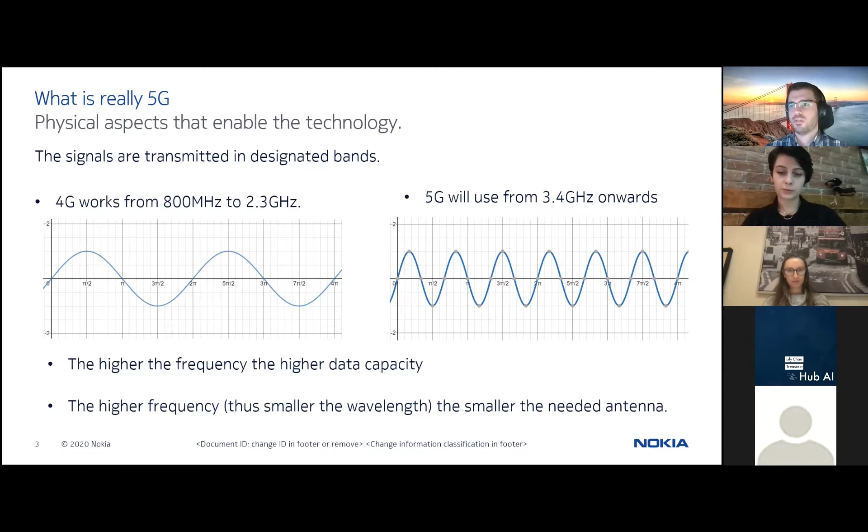If we move to the old solution, the antennas usually radiated everywhere. You could have a phone, not even using it, but the antenna is still transmitting to your phone, like 'hey, are you here? Are you available for me?' What this means is that we are losing a lot of power. The antenna is constantly transmitting, everybody's getting radiation, everybody's getting data that isn't useful for them. And you cannot predict anything, you don't want to predict anything. You just transmit everywhere, that's it.

But if we move to high frequencies, and avoid having a building between your antenna and the device you want to reach, then we can lower the power of the signal and direct the beam directly to your device. This brings a new term: massive MIMO antennas, meaning multiple inputs and multiple outputs. Because these signals are so small, we can build smaller antennas. So now we have hundreds of mini antennas in one array, while before we had only one big antenna transmitting everything. Now we have hundreds of antennas that have the opportunity to create beamforming.

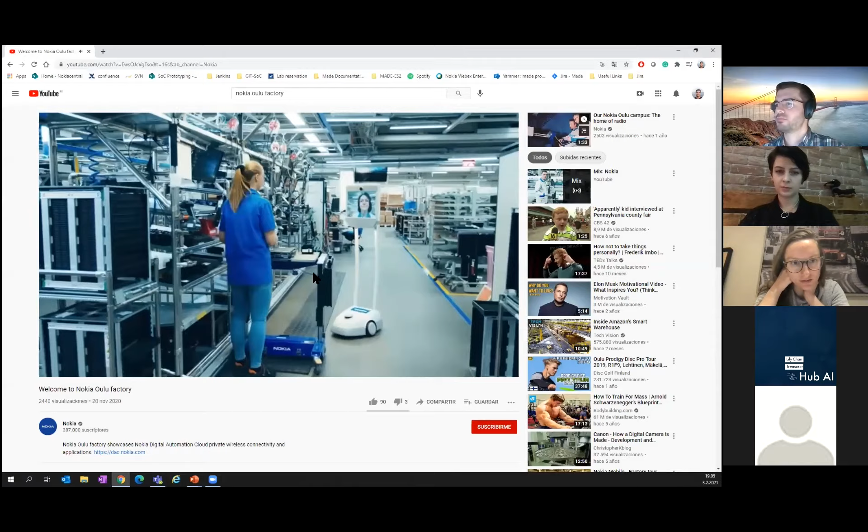Welcome to Nokia Oulu factory, or home of radio, as we call it. This is where we produce 5G equipment, and my name is Erno. Oulu factory is a terrific showcase of our Nokia Digital Automation Cloud, the plug-and-play, industrial-grade digital platform for connectivity and applications. Now let's have a quick overview of the solution.

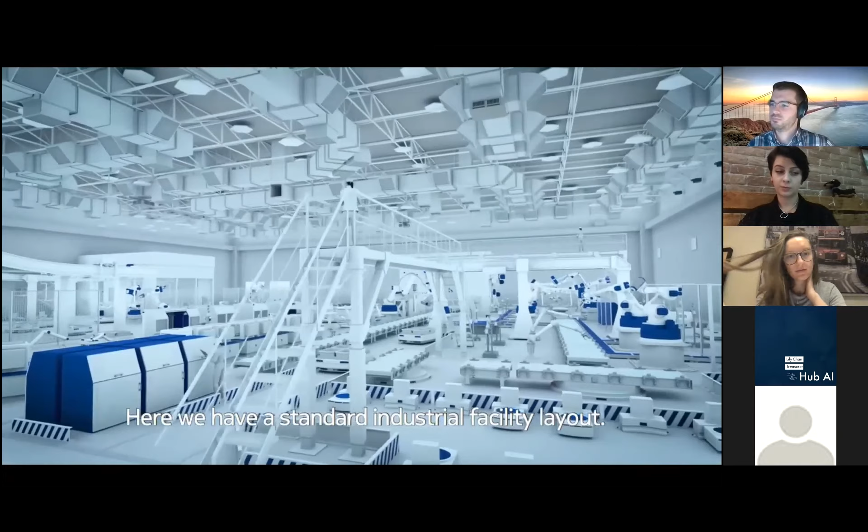Here we have a standard industrial facility layout. These dots are your LTE access points that bring connectivity to the whole area, to all your equipment and applications.

This is your local edge server, to which the access points connect. The solution has built-in redundancy, meaning that if one part of the digital platform fails, another part takes over automatically and there is no service disruption. The system is not dependent on one access point or edge server.

In our factory, redundancy enables even the most critical applications to be connected wirelessly, like this testing cell in the modular automation concept line.

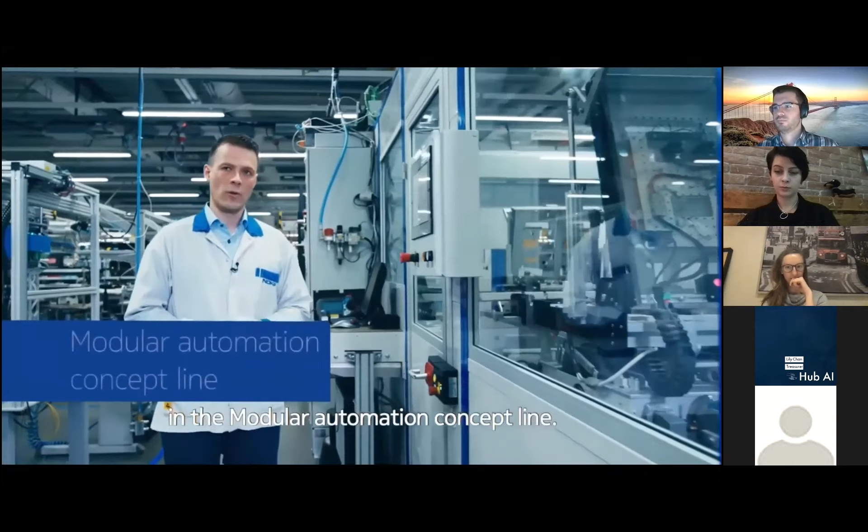LTE covers 85% of today's industrial connectivity use cases, and the LTE device ecosystem is standardized too. For extreme capacity and ultra-low latency needs, the upgrade to 5G is easy. Simply install 5G access points and they work seamlessly in your private wireless network. The local edge server can be upgraded with software.

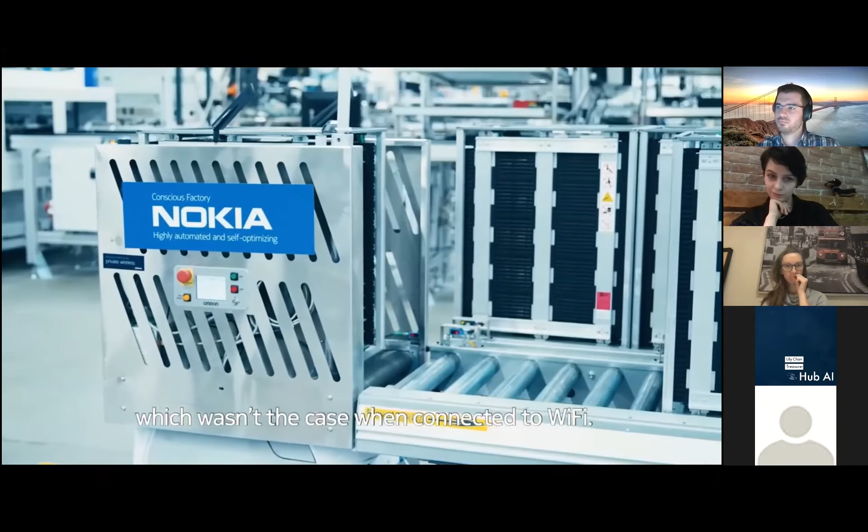Digital Automation Cloud increases productivity at our factory. We have connected AIVs to the private wireless network, and now they can run without interruptions, which wasn't the case when connected to Wi-Fi. AIVs enable automated material feed. Our smart buffers send automated requests to the AIVs based on sensors. We can also call the AIVs to the production line when needed by pressing a button that is connected to the private LTE.

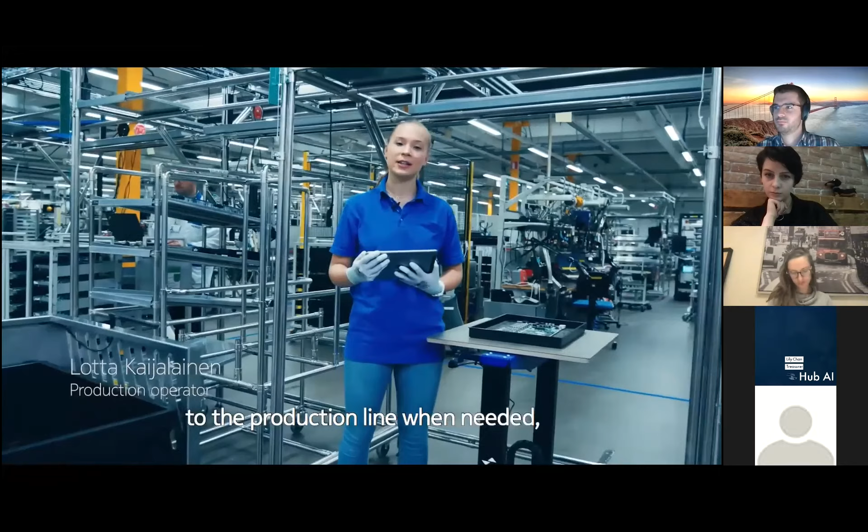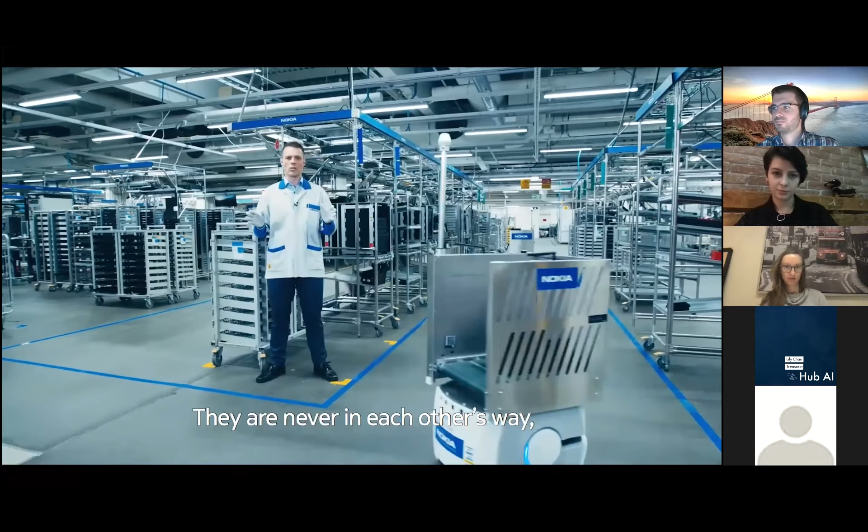Thanks to a fleet manager, the AIVs work in a smart swarm. They are never in each other's way and they share the workload optimally. The AIVs can also monitor the network capacity and coverage in real time.

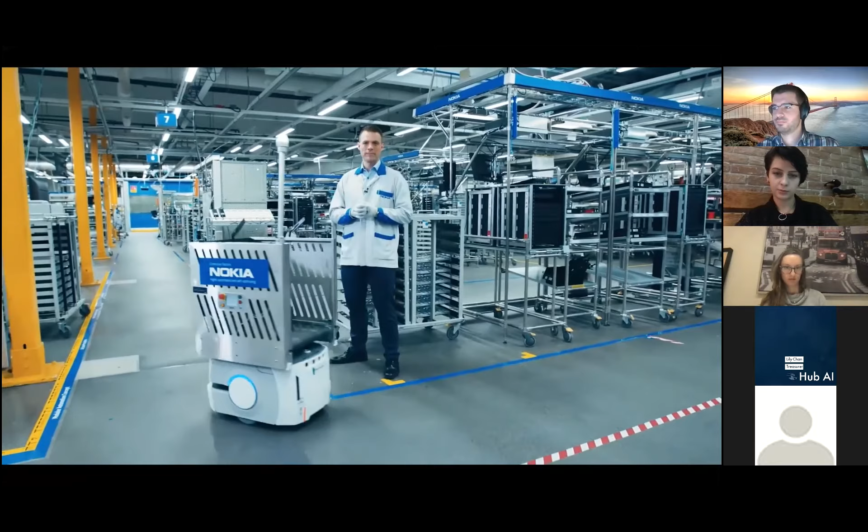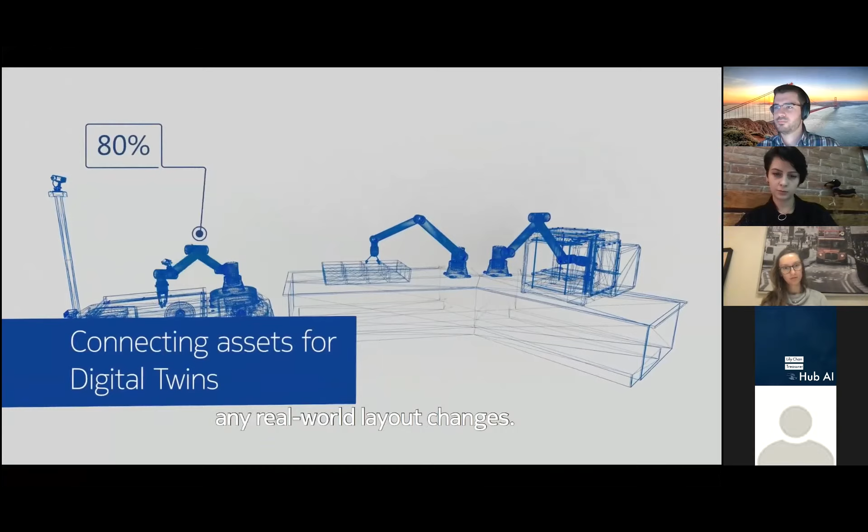Digital Automation Cloud is the foundation for building digital twins of your processes. Productivity increases can be verified with a digital model prior to you making any real-world layout changes.

Digital automation enables real-time video analytics. In this case, we are tracking production material quantities. But video analytics can also be applied to production quality control.

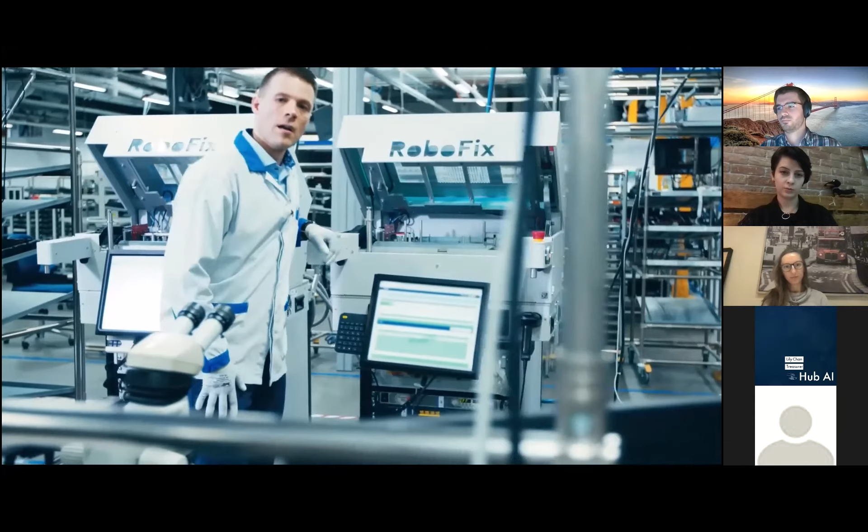When it comes to connecting production equipment, private wireless allows better flexibility than fixed lines. This way we can easily adapt to rapid changes on the production floor.

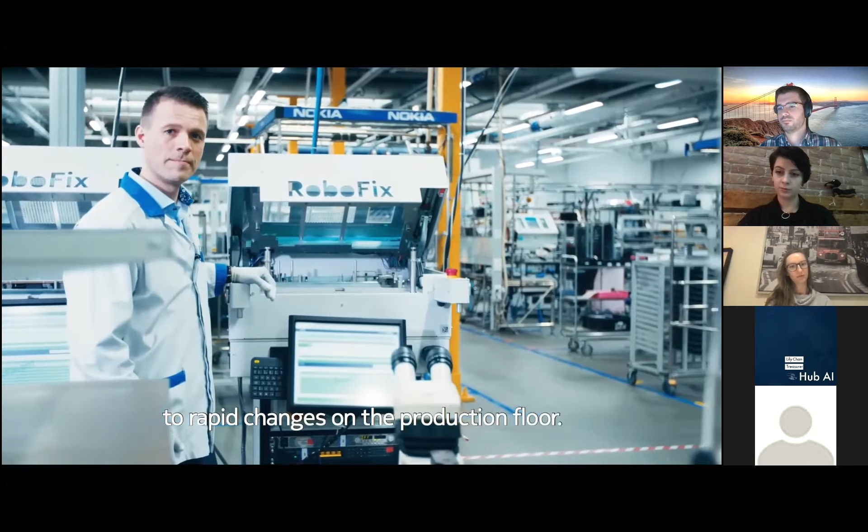Flexibility indeed is one of the reasons to choose wireless connectivity. You can make flexible layout changes in your assembly lines without cabling slowing you down. That brings cost reductions. A wireless network also means less configuration work when you alter the production layout.

In our factory, there are layout changes pretty much every week. Like this line here, it was built up just within days and will be moved to another location after a couple of weeks.

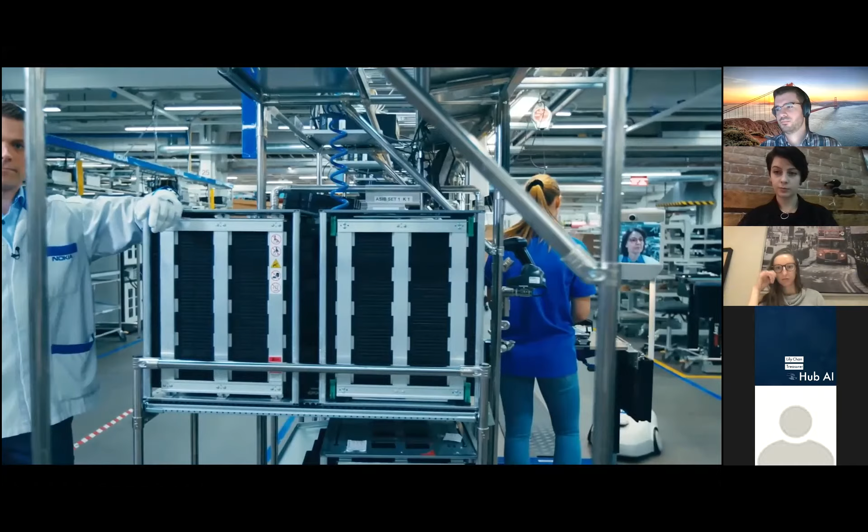Network slicing enables you to separate traffic from different sources or between different user groups. You can guarantee capacity for priority use and split the network resources accordingly.

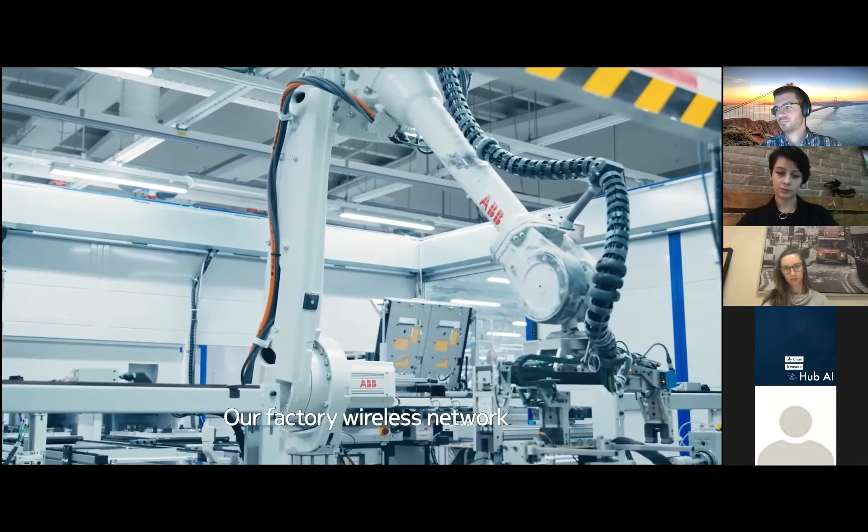Our factory wireless network has the capability to slice the network with different access point names, APNs. We plan to use this feature to separate the production environment from the development environment. We also plan to use this to separate personal voice or video communication. This way, we can ensure that the production network is always prioritized.

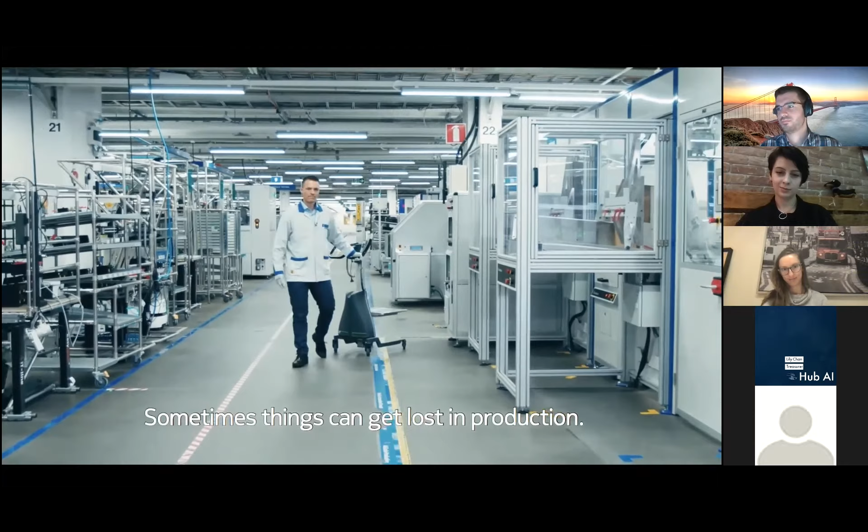Sometimes things can get lost in production. That's why we added the high-accuracy indoor positioning system to give us the real-time position of our assets. Now I know exactly where this lifter is located.

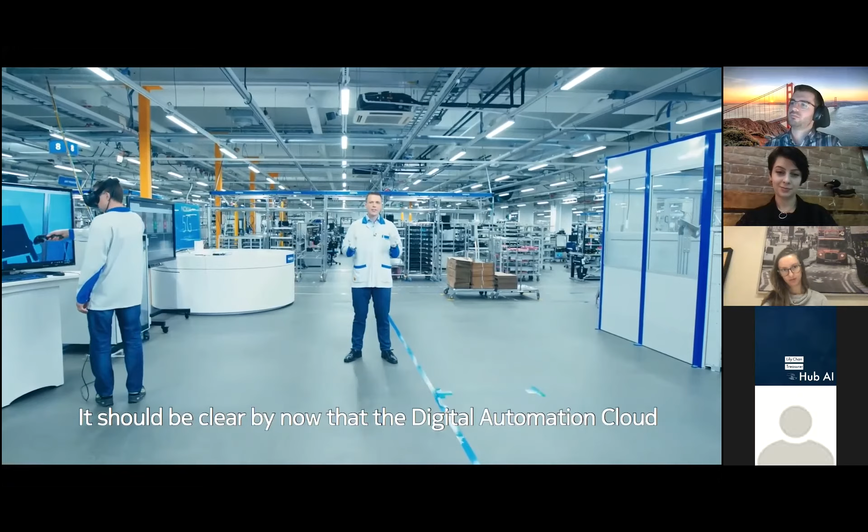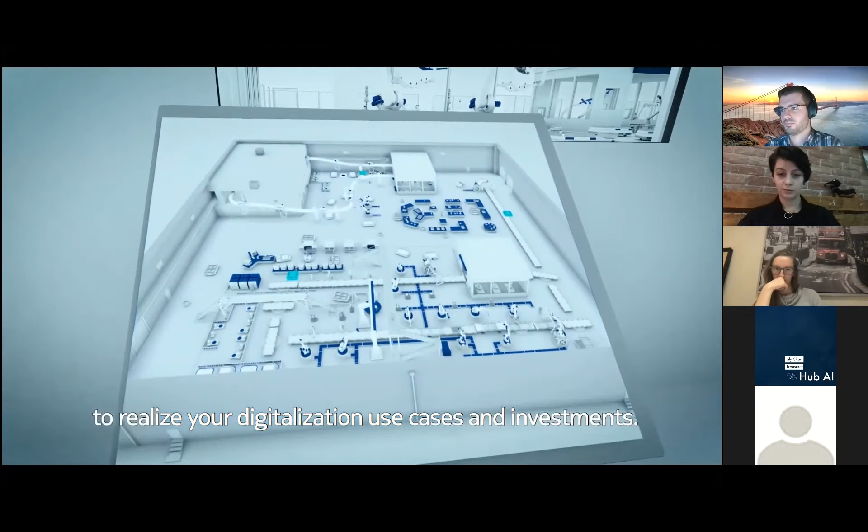It should be clear by now that Digital Automation Cloud brings us real value beyond connectivity. This value comes from the applications I quickly demonstrated, but there's so much more. Nokia Digital Automation Cloud comes with a catalogue of applications, some from Nokia, some from existing ecosystems. You can click and deploy applications to realize your digitalization use cases and investments. The applications run locally, thanks to edge computing capability brought by Nokia Digital Automation Cloud. That's it, folks. I hope you enjoyed our tour of digital automation in Nokia Oulu factory.

So I think I have talked about all those topics before, and now I think you can understand what those topics are: What is network slicing? What can be self-organizing, and how we can save resources like that.